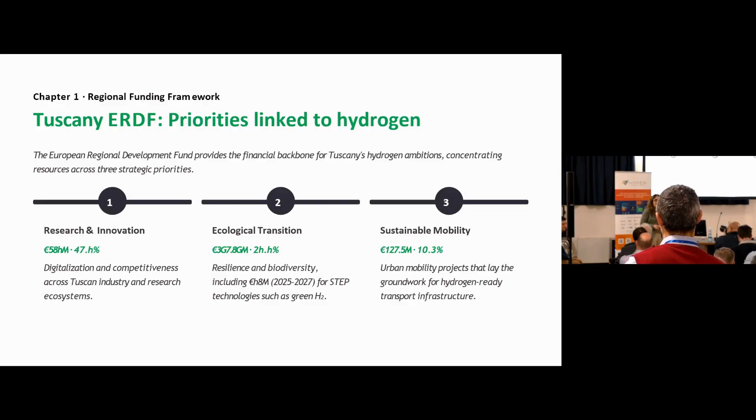Just a quick overview on the current programming period of the EU budget. We don't have a chapter on hydrogen, you can imagine, but we have some goals and policies that have already defined the priorities for development in the 7 years inside the region, with the cohesion funds that, after 2027, will not be available for regions anymore - this is very worrying for us. We have almost 50% of budget already allocated on research and innovations, and here hydrogen and other related research and innovation can be found. We have another 30% on ecological transition and 10% on sustainable mobility.

This is how the European funds are allocated in the current budget from the regional government of Tuscany. But going fast to the hydrogen sector, we started - I have to say it's not written here - in 2020.

After the COVID pandemic, we had to stop everything, and then we started a hydrogen board in 2022. The main focus was to say, okay, it's a new chapter for us. It's something very new for an institution, but we need to know what's going on in the region. So we had a call to collect all the projects that were going on, or imagined, coming from all sectors - research groups, universities, institutions, not so much, but mainly private sector.

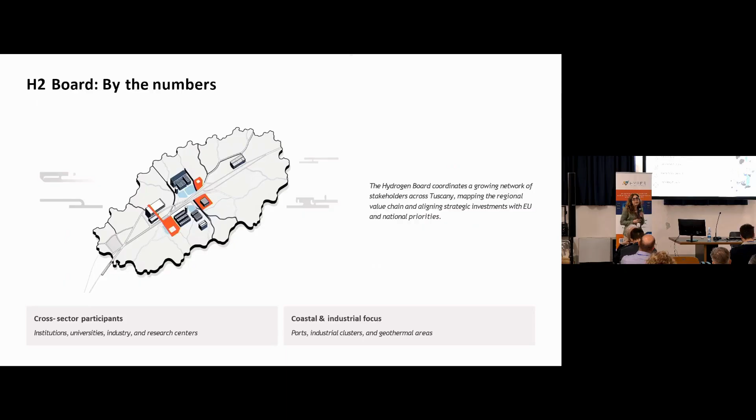So the board is increasing the network of people sitting around. We have gone through 2 years of discussing, exchanging views. It was not very practical, much more about knowing each other, understanding from our side what was worth working on at our level, and especially, as I was mentioning, in the logistics part with the Port of Livorno.

Then in 2024, the Port of Livorno came to Brussels, to my office, and that's the part in which we, as a Brussels team, jumped into hydrogen. You can say, what does it mean? It's not only me or my team, but we involved 4 different departments: the energy department, the economic development department, the competitiveness department, and the university and research department of the Tuscany region.

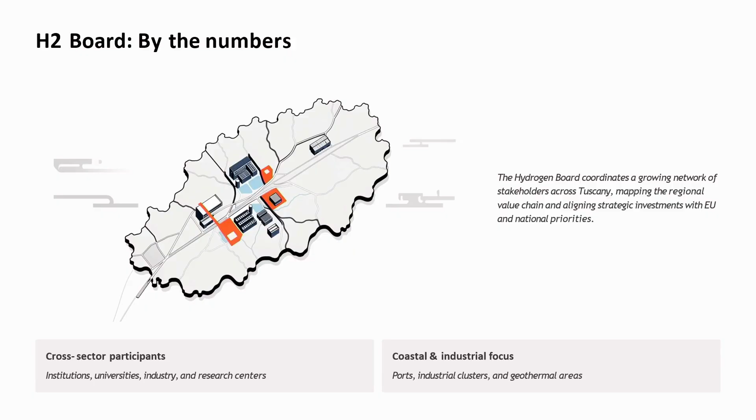So they are all part of the board. Then from 2024, we as Brussels office were focused more on how the Commission could help us push and boost the implementation of hydrogen valleys. There were some calls published by the Hydrogen Partnership, the joint undertaking, and we were interested in that. That's the reason why, and we wanted also to see what's going on in other parts of Europe.

In the meanwhile, in 2023, there were the NRRP calls from the Italian government, with 500 million in national budget allocated for hydrogen in industrial zones. Tuscany received a part of this budget, and 17.5 million were allocated to one flagship project. We had a call at the regional level, and we had 5 projects.

It's a very advanced technology, so it's still a little bit early. But the biggest one was this flagship project for a hydrogen valley in Rosignano, with Sapio and Solvay Chimica Italia, and this was the total investment that should come at the end now, or maybe just a little bit later. As you can see, there was a big focus on chemical industries, and that's one of the hard to abate sectors that we have in Tuscany.

But we have much more. We have many others - for example, the golden sector in Arezzo. They already have a hydrogen pipeline for green hydrogen, and they are also interested. We have in Lucca the paper industries. So we have some sectors in Tuscany that need to be focused on - they have hard to abate energy sectors that need to transfer and find other types of technologies.

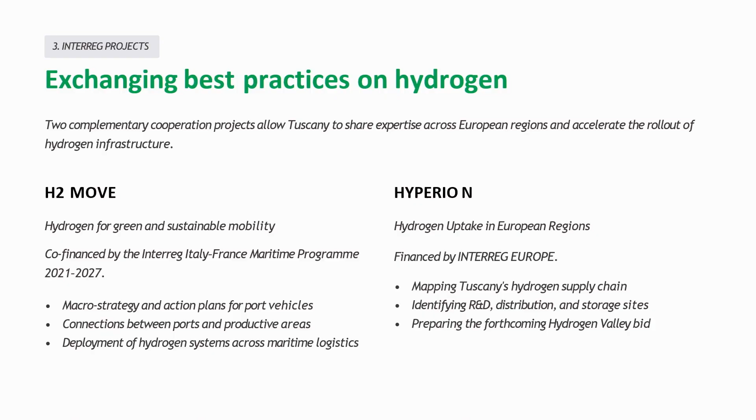And then we have H2 Move, run out of the Department of Infrastructures and Mobilities of the region, that is also part of the board - I forgot to tell you. And because, as you know, logistics is one of the main areas where you can apply hydrogen - big, heavy logistics, not private. Here in the master plan of the port, again, we are working together just to define the same main goal.

So what is going on now from 2025 until now? We are at the end - just two more slides, maybe three, no more. We have mapped the H2 chain, and on that we have selected, inside the board, a group of partners that can work on writing a business plan for our hydrogen valley.

Because we tried - there was a call in the second part of 2025, so we tried to push and prepare a document. We were in contact with the hydrogen partnership, but the part that was missing for us - we had the part related to research with the universities, we had our main goal, we had the Port Authority, but the problem was more understanding the potential market and the market agreement between the producers of hydrogen and the consumers.

And how they want to move and invest also, because we need big investment also from the private side. We don't have investment at a regional level - we can just take something. We are looking for the next call that will be in 2027, but it's just for a small scale hydrogen valley - now there has already been a sort of big scale hydrogen valley.

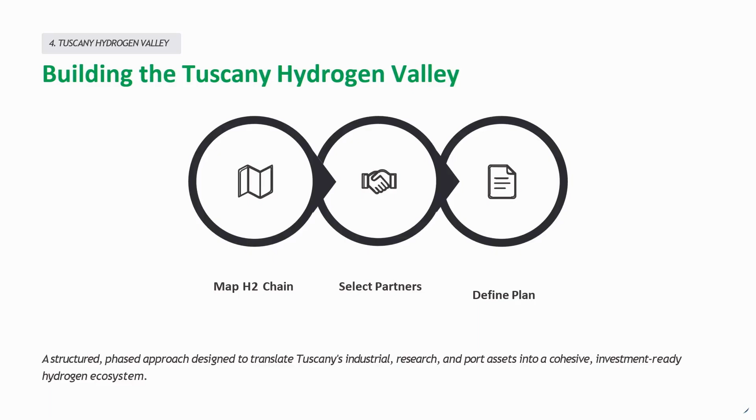So, with them, we define a plan. We ask the private sector: do you want to put your technicians with us? Just make some teamwork and see how you can put in your knowledge, because we know policies, but we are not technicians. So you can tell us more about what your companies can really provide, what is needed from your side, where you can invest, where it's worth investing, where the market can go, and if it's acceptable or not from your side.

So this is a small team that is now working, with Tuscany as lead developer inside, with the port of Livorno, because we want to build a hydrogen valley in Tuscany, but starting from the coast and from the port hub of Livorno, because we think this is very strategic.

The port of Livorno, as I was saying, in June 2024 defined a memorandum of understanding with the port of Damietta in Egypt to import green hydrogen, involving the Arab Academy and the University of Pisa, just to see how to face the challenges related to transportation of liquid hydrogen.

This can be something to look at for how to import, because as you know, here in Italy and Tuscany we have big problems having renewable energies that can be used for producing hydrogen, plus protecting the landscape and all the issues we know about. So a part could also be imported through a corridor, which could be interesting not only for Tuscany but also for Europe or Italy, through the port of Livorno, going up to the north.

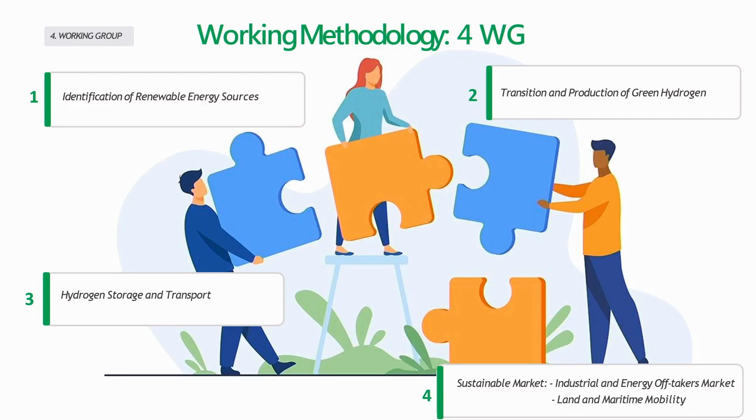Then a part is more logistic, transport and storage of hydrogen, and this is Piombino and Livorno, as I was saying. And then the part related to the sustainable market, so off-takers and industrial, and on the other side, the part more related to land and maritime mobility or local transportation.

2026. There is now a call on PDA Light to support a pre-feasibility study on a hydrogen regional valley, just launched now. It ends at the end of June. I don't think we will be ready for that. We will try, maybe, but I don't know, question mark.

But we know there will be another call in the second semester. So maybe we will apply then, but we need to have a ready business plan, supported by the hydrogen partnership, and then, as I was already saying, apply next year for the Hydrogen Valley call, and see what other type of investment we can attract in our region to push sustainability and transformation in the sense of hydrogen. Okay, I have finished. Thank you for your attention.

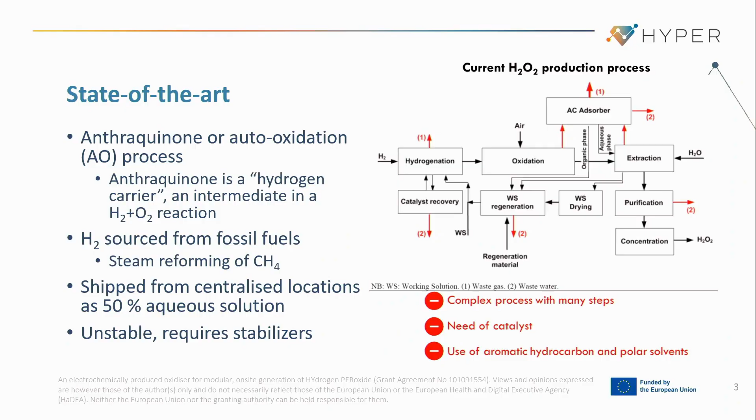So what we wanted to do is break this down and do it electrochemically and modularly. The idea when we wrote the project was that we would start with sulfuric acid and do an oxidation of that sulfuric acid to a persulfate. The byproduct on the cathodic side of the reaction would be hydrogen, which would be one of the added values you could get from the process. When we wrote the proposal 5 years ago, we were thinking you could store this persulfate as a chemical energy storage medium. The chemistry goddess does not allow us to do that efficiently, so that is not something we were looking at much anymore.

But then the second step of the process is what we call the utilizer, which takes this persulfate, reacts it with water, and gets the hydrogen peroxide out. This is electrified, so we can use green electricity to do this transformation. The steps are much simpler, we don't need a catalyst, and we have anticipated hope to get around 75% decrease in greenhouse gas emissions with this process compared to the state of the art.

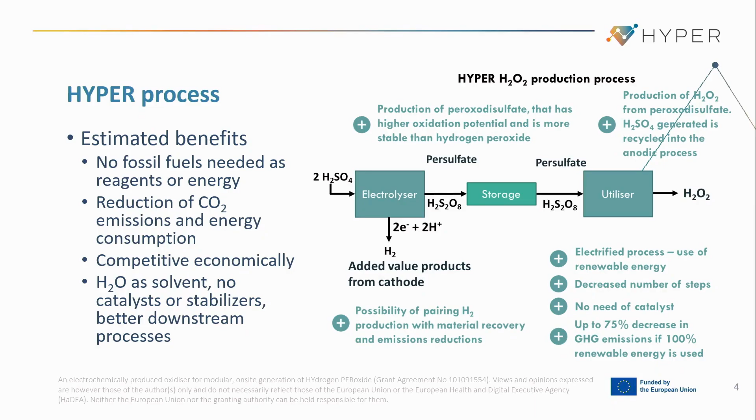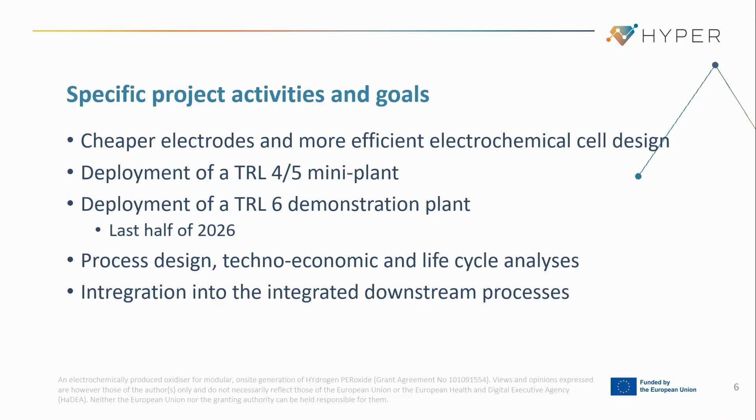So what you'll hear a little bit more about after I'm done are some of these things. In the project we've made cheaper electrodes and come up with a more efficient electrochemical cell design - that will not be part of the program today. You'll hear from Gregor at JSI in Slovenia about the deployment of our TRL4 mini plant. Andre from Belinka will talk about the deployment of the TRL6 demo, which will be happening later this year. Honk from PDC in the Netherlands will talk about the process design and techno-economic assessments we've done. Stavros from Everstang in Luxembourg will talk about the life cycle analysis, and then we'll have one of our downstream integrated processes presented with David from Helios.

So thank you very much. You don't want to hear any more from me, you want to hear from the people who actually did the work. So thank you very much.

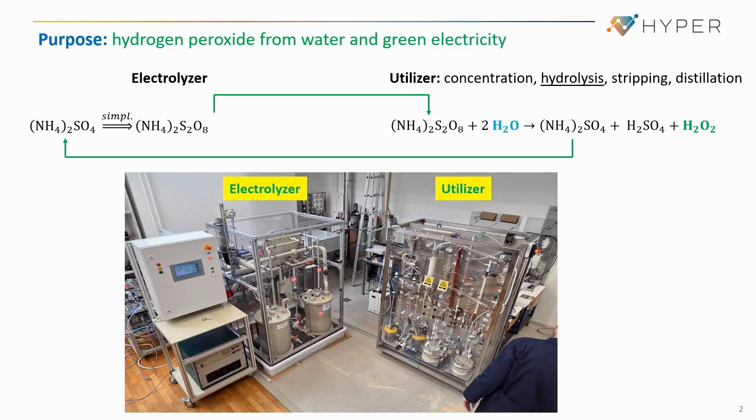The whole process is composed of two major steps: electrolyzer and utilizer. In the electrolyzer, we convert sulfates into persulfate using electricity. This persulfate then enters the utilizer, where it is converted into hydrogen peroxide. Sulfate is generated again and recycled back to the electrolyzer, so it's not consumed, it's a circular chemical that keeps the reaction going. The whole process is divided into two sub-steps.

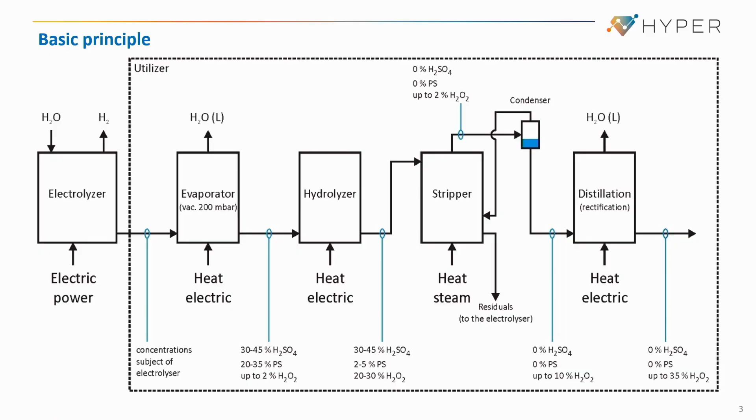The electrolysis is basically a one-step procedure, while the utilizer requires more steps. In the first step, the evaporator, we increase the concentration of the persulfate by evaporating excess water. Then we enter the hydrolyzer, where the persulfate is converted to hydrogen peroxide. Then we separate it from the rest of the chemicals, done in the stripper, which is driven by steam. This resulting low concentration hydrogen peroxide enters vacuum distillation, where we reach the target concentration of 30% or similar.

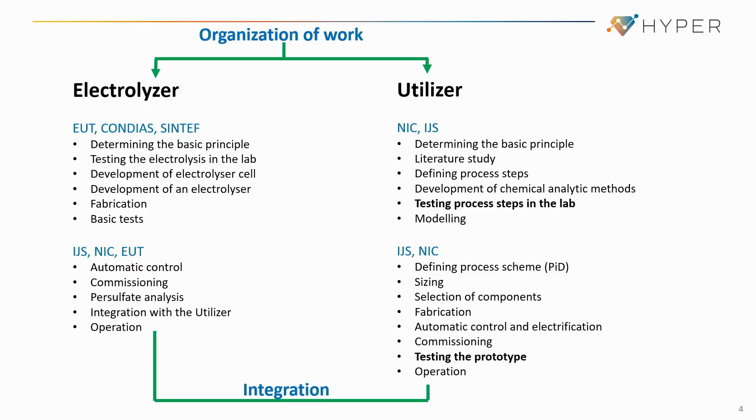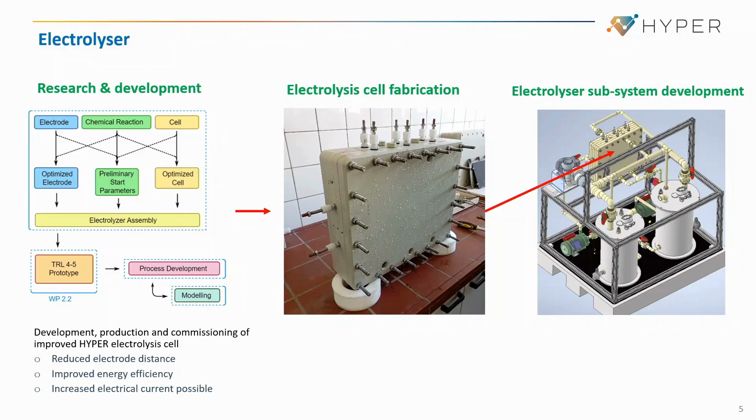This is how the electrolyzer was developed. It started with basic engineering, studying all the chemistry in the electrolyzer and designing the main components like electrodes, diaphragm, etc. This resulted in an electrolysis cell, shown in the middle picture. Around this cell, the whole system was designed with all the balance of plant components shown on the right side.

The utilizer development also started with basic engineering. First, all steps of the procedure were identified and literature was reviewed. Then all those steps were tested in lab environments, checking if all chemical reactions went as planned. One important thing was also the development of chemical analytic methods, necessary to measure the presence and concentration of the components appearing in the chemical reactions.

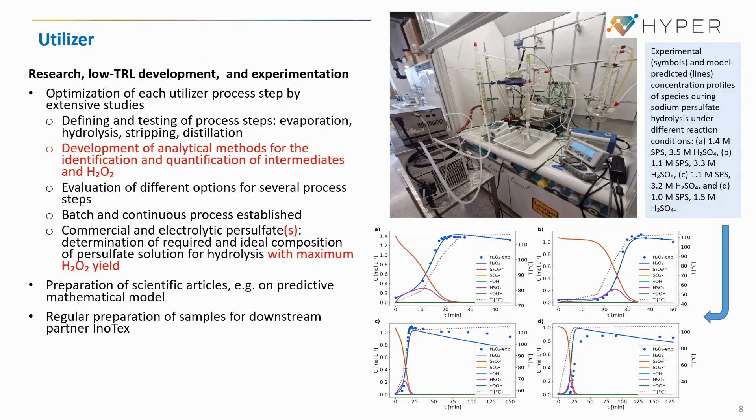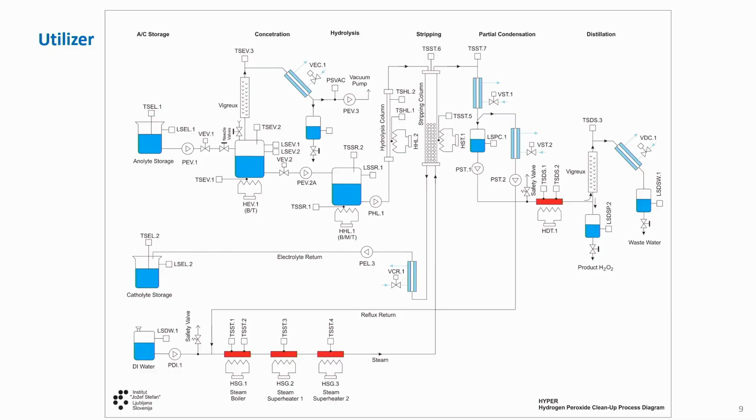Once that was completed, we developed this diagram, showing the basic components. This was a prerequisite for selecting the components and sizing them. The decision was to use glass as much as possible, because by using glass we avoid compatibility issues with aggressive chemicals. Also, with glass components we can easily see what is happening in the device, which is very important for troubleshooting in this early stage of development.

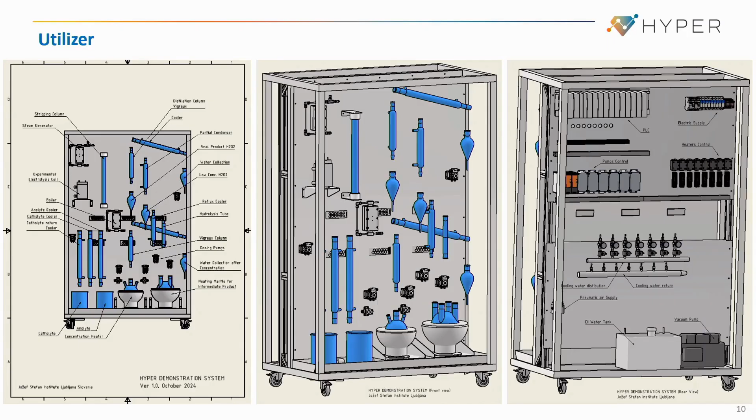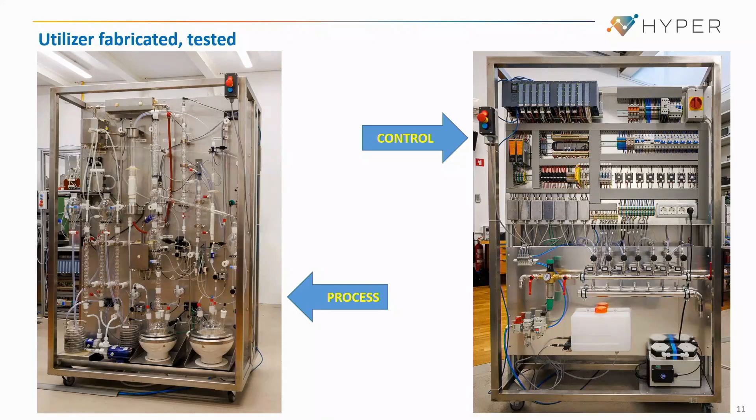This is one of the earliest 3D models of the entire system, showing the position of the equipment and components. This picture shows the system as fabricated. It's organized so that the chemical and electrical parts are separated. The chemical part is on the front side, safely separated from the electricity and control, which is on the back.

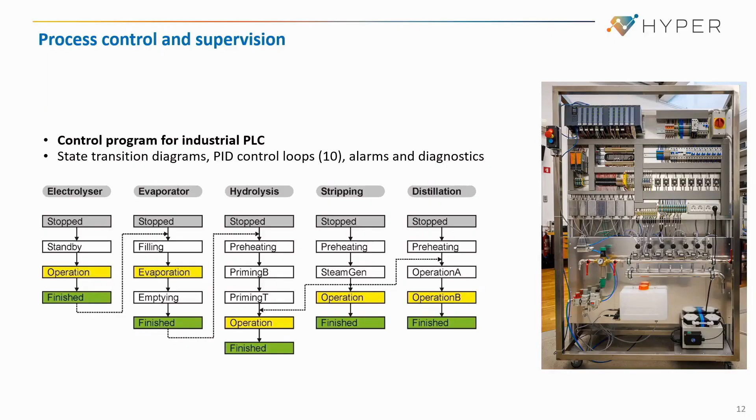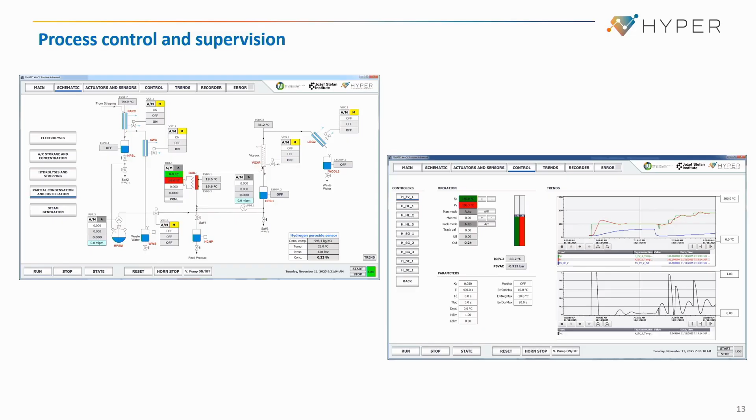Like any other process, this one is equipped with a SCADA system, so there are a number of screens that show the condition of the process, and all the variables and process states can be monitored using these screens.

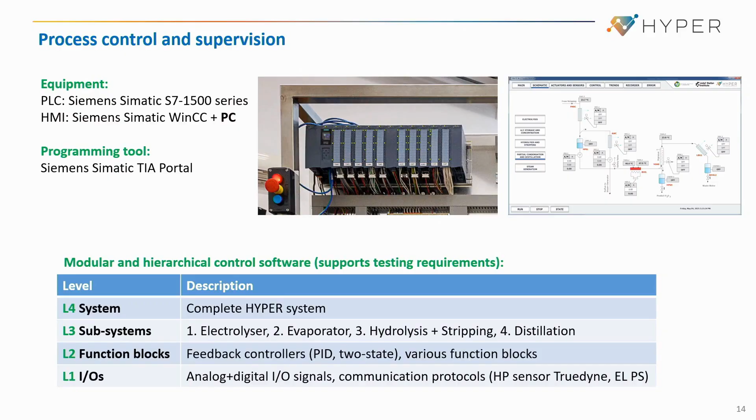The control is implemented in an industrial controller, which controls the complete system, utilizer and electrolyzer. There is a 4-level control. At the lowest level, we have input-output signals, communication protocols, and the possibility for manual intervention. One step above is a layer of feedback controllers, like closed-loop PID controls of various variables, plus other function blocks. On level 3, we have state transition diagrams for all sub-processes, and at the top level is the coordination of all sub-processes to run as an entire unit.

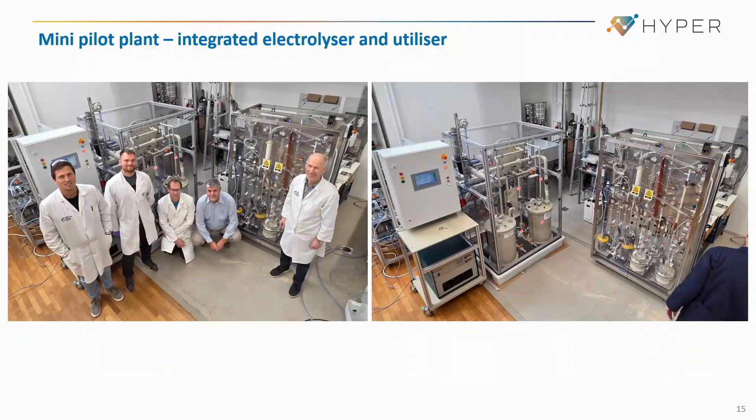So the process was built, it is up and running. Now intensive improvements and modifications are going on to make it completely automatical and to reach the TRL6 status.

One important project result is the demonstration of this process in the textile industry, at Inotex company in Czech Republic. This was done at the end of 2025 successfully. We moved the whole device to the Czech Republic, to Inotex, installed it, ran it, and produced hydrogen peroxide, which was then used in the textile process to prove its efficiency. So this is the main result.

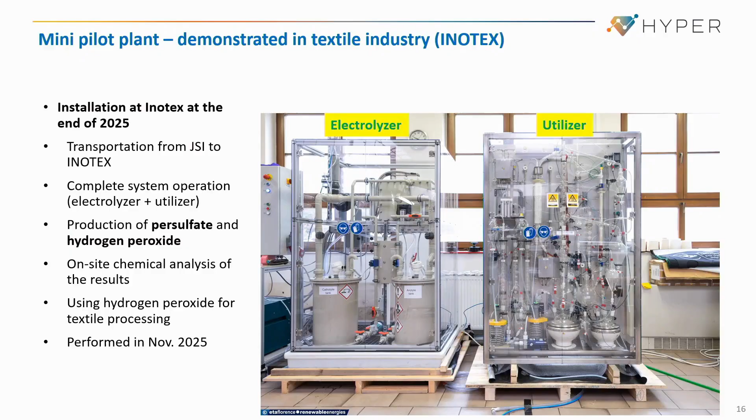Now we are aiming at final improvement and modification of the system and installation in the chemical industry in Slovenia. Thank you, this is all from my side. If there are questions.

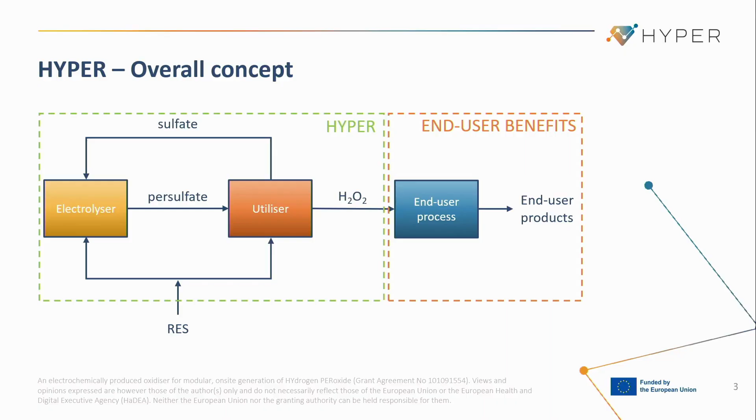So this is the concept we've seen before. We have the electrolyzer on the left side. The persulfate storage was indeed an idea, can still be done, but it turns out to be quite difficult and not so efficient. And then on the right, we have the utilizer, as just explained. Here it's even in a simpler way. We can produce hydrogen peroxide at several concentrations, from 5 until, say, 50%, depending on what is required.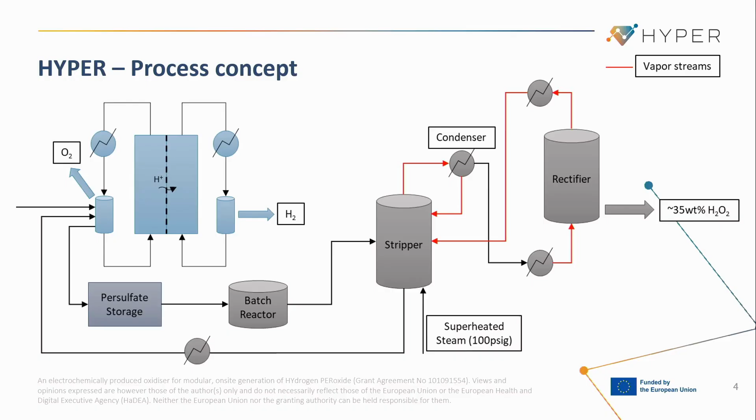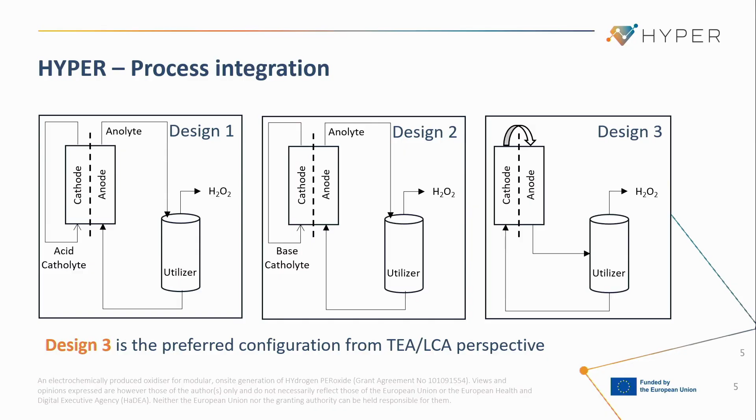The integration was a specific topic because if you look technically at the system, you could operate the catholyte system separately from the system with the electrolyzer and utilizer, which produce the persulfate. On the left, in design 1, these loops are separate, and you can use different kinds of catholytes. But we found out that to minimize the loss of sulfate and chemicals, the best way is to integrate it over the cathode to the anode and then to the utilizer and back. That was the preferred configuration from the techno-economic perspective and also from the life cycle analysis perspective.

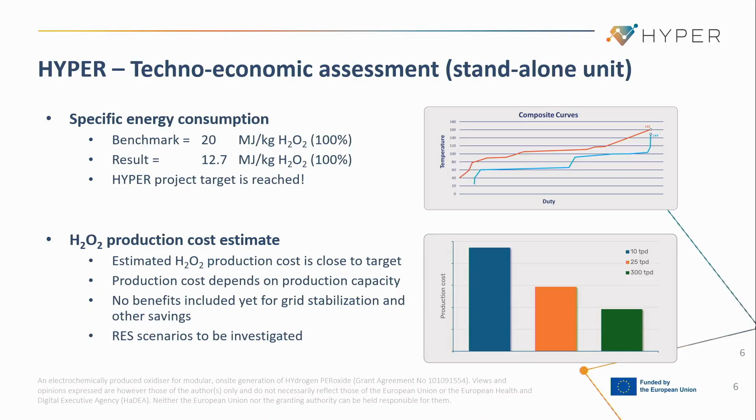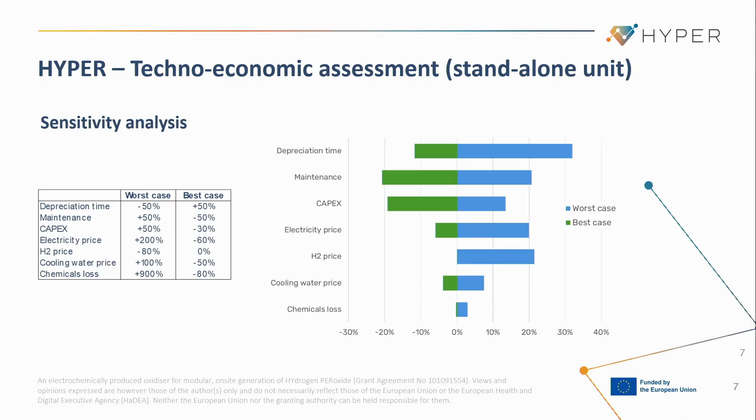We also did some sensitivity analysis, and you see that particularly the capital costs are quite important, especially if you build smaller systems, and then capital weighs quite heavily. If you take different depreciation times, you see that the spread is rather big. Also maintenance costs and capital costs are quite important, followed by electricity and also the selling price of the hydrogen.

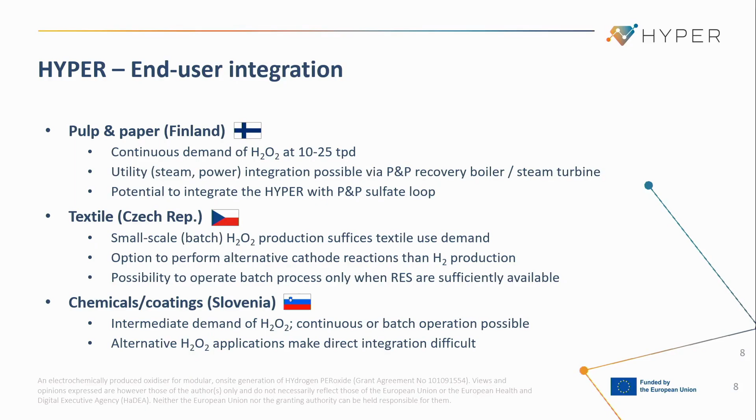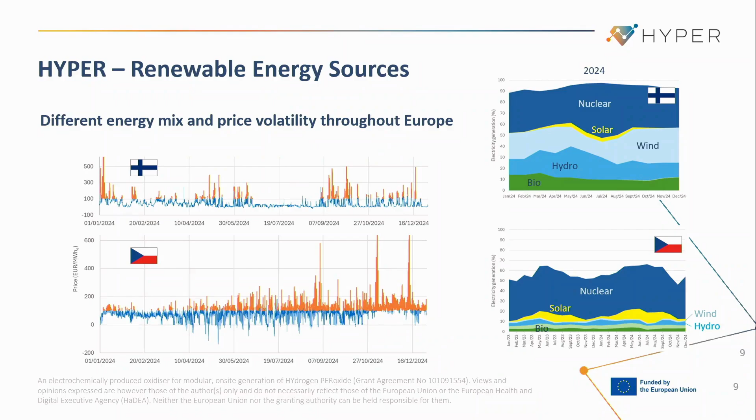Now, if you look into the renewable energy sources, you see that a lot of people talk about the EU mix, but actually that doesn't exist. It's more regional, or as I look to you, Sylvia, it's more per country. You see, for instance, that in Finland the energy mix is totally different than in the Czech Republic, and the pricing is different over time and also per country. So that is something we now work on implementing.

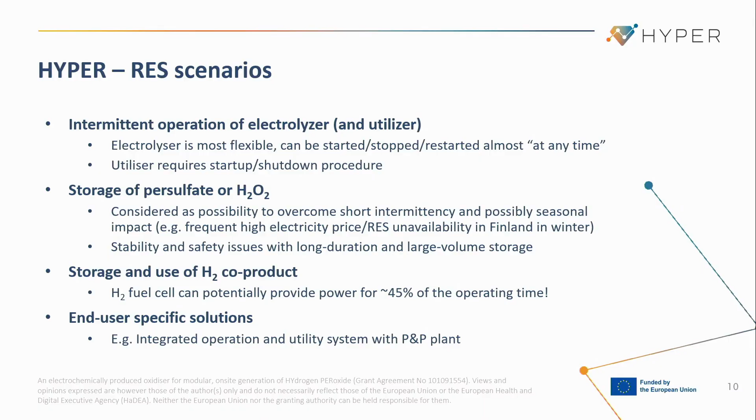And of course the safety aspects are also important if you start storing persulfate or peroxide. We also look at the co-product. Will we sell it? Can we use it ourselves in the periods that we don't have electricity? And we can also have alternative solutions in connection with the end user application.

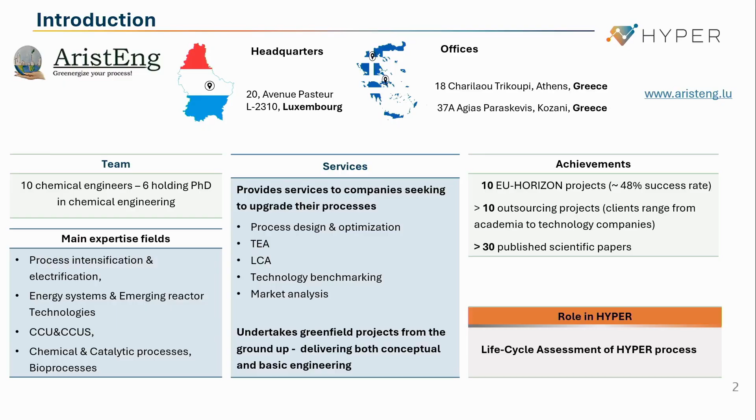In this project, we focus on LCA analysis. So we are performing the environmental assessment, and we focus at the moment on the calculation of carbon footprint, aiming to identify the polluting drivers at this level. So what is a polluting driver for our Hyper process? And to do that, we also make a scenario analysis.

Since Hyper is an electrified process, electricity plays a major role. So we make a sensitivity analysis regarding the impact of electricity. We vary the source of electricity from 100% grid to 100% renewable electricity. How do we do that? We increase the penetration of renewables.

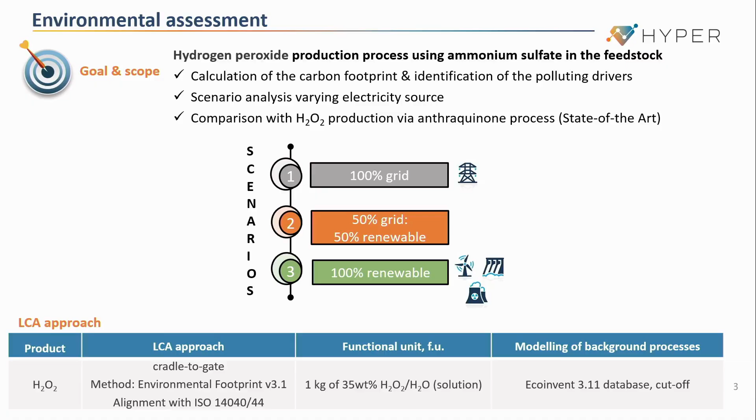The method that we follow is a cradle-to-gate method, following the environmental footprint approach, which is aligned with the ISO standard 14040 series. The functional unit for our analysis is 1 kilogram of diluted hydrogen peroxide, 35 weight percent in water. So throughout the presentation, when I say functional unit, I refer to that value. All the background processes beyond Hyper are modeled using the Ecoinvent database. The boundary limits for our analysis are perfectly aligned with the TEA, so LCA and techno-economics follow the same boundary limits, to give the proper message to the audience.

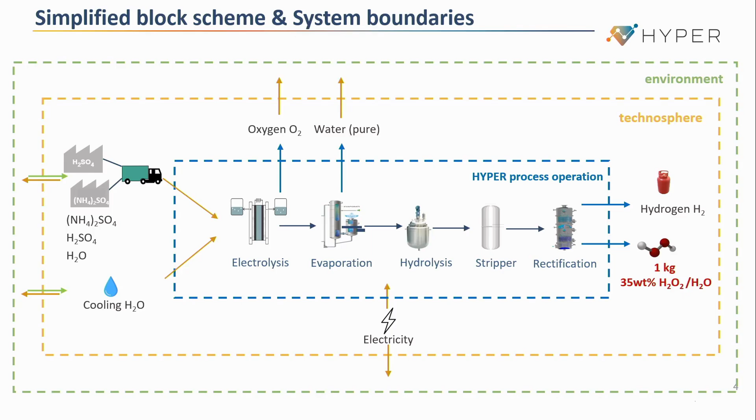So we start with the blue box, which is the Hyper process, comprising different process steps, and then we also model the interaction with the technosphere. Basically, we model the raw material inputs and the electricity or energy input, and also the outputs from our process, which can be the products, but also some side streams, and of course the impact they have on the environment.

So we calculated the carbon footprint equal to a value of 0.36 kilogram of CO2 equivalent per functional unit. And as I said, this is based on grid electricity EU mix, due to the volatility and the differences in the carbon intensity of the grid in several countries. At this level, we focused on EU mix, but we are planning to take this into account by applying Monte Carlo sensitivity analysis and uncertainty analysis, in order to see what is the impact of different geographic location on the carbon intensity of the electricity. But this is to be done in the coming months until the end of the project. At the moment, we focus on the EU mix, which is a valid approach in order to have comparison on the same basis.

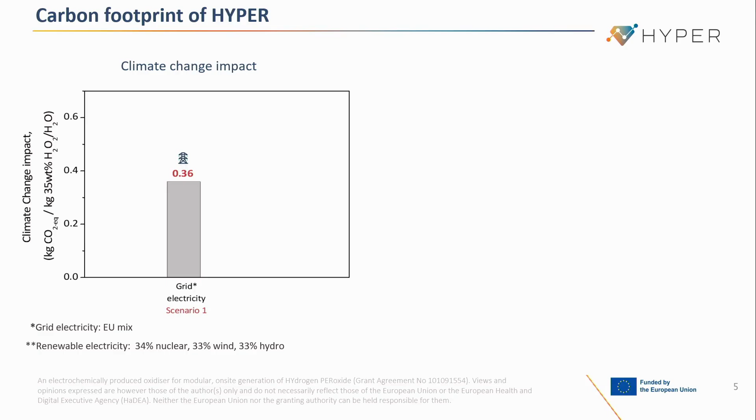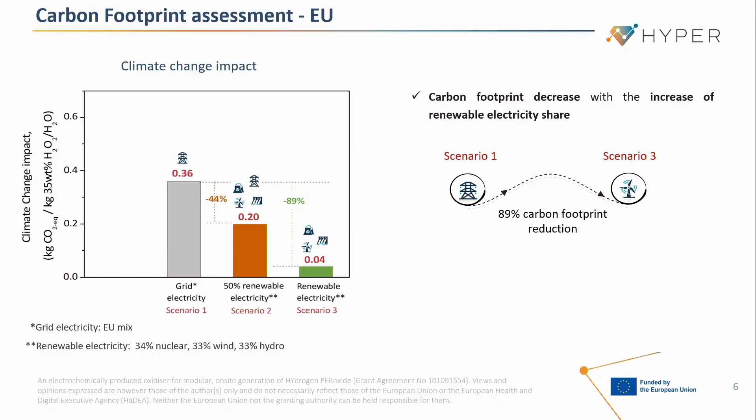And we also found, as expected, that when we increase the penetration of renewable electricity, we can decrease the carbon footprint of the Hyper process by 90%. So moving from grid to fully renewable, we can decrease the carbon footprint by 90%. The EU mix grid, according to the Ecoinvent database, includes some renewables, around 40% powered by renewables. And when we go to fully renewables, we have a 90% decrease of carbon footprint. Of course, these numbers don't say anything if you don't compare them with the state-of-the-art process, which will come soon.

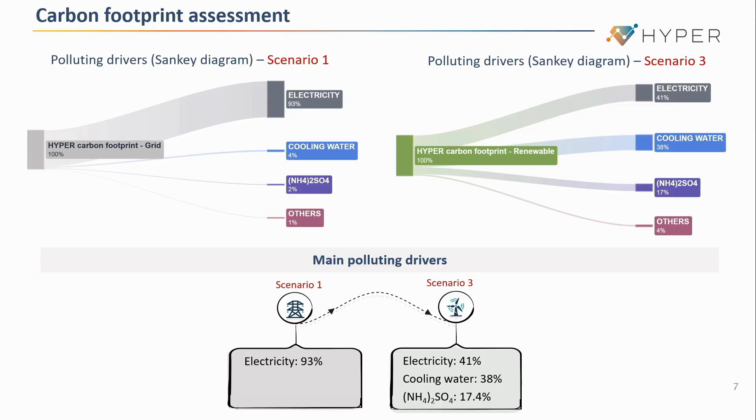But first, I wanted to show you what is the polluting driver of our process. Of course, it is electricity. Even in the scenario where it's only powered by grid electricity, or the scenario where we have full renewables penetrated in the electricity source, our polluting driver is electricity.

Comparing this with anthraquinone, we have some nice results highlighting the potential of our Hyper process for hydrogen peroxide production to decrease the carbon intensity by 40%. Anthraquinone in the first bar has 0.6 kilograms CO2 equivalent per functional unit. We can go to 40% less assuming electricity source by grid, and 93% less assuming fully renewables. Of course, the penetration of renewables depends on the geography.

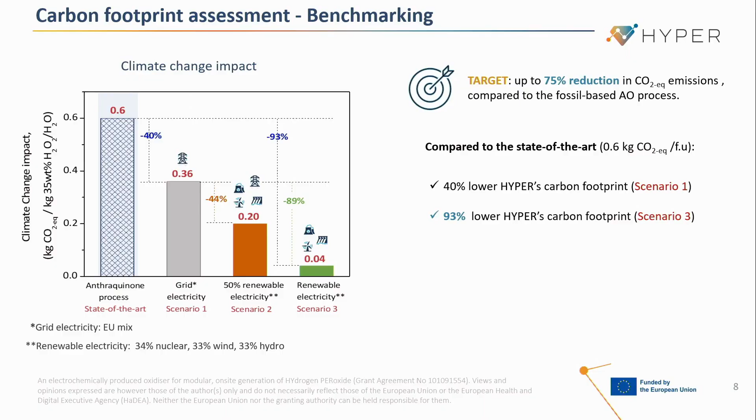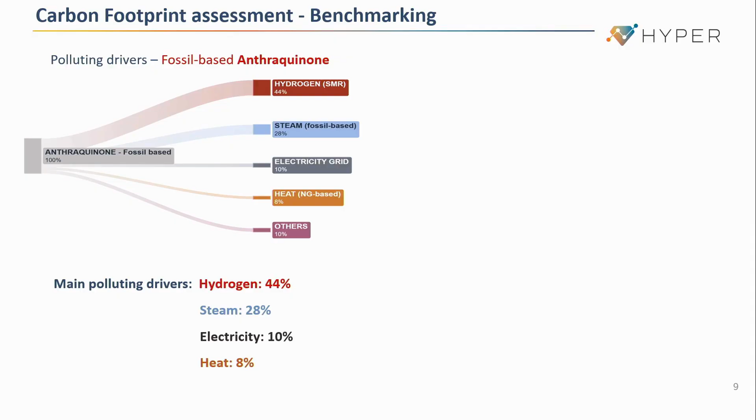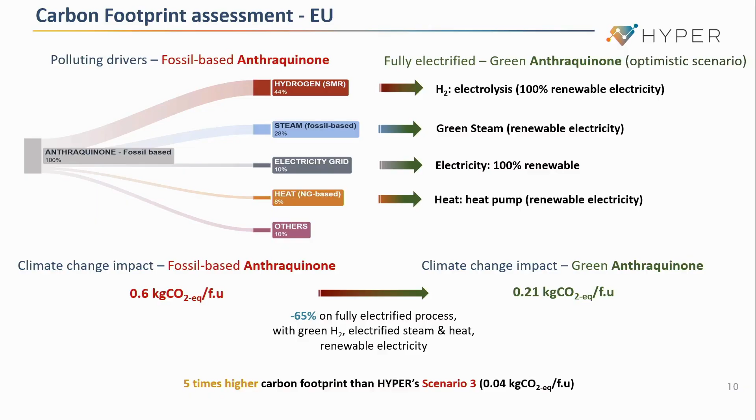What if we make an assumption and make anthraquinone green? The hydrogen required originates by electrolysis powered by renewables. We have so-called green steam, produced by renewable electricity. So everything is powered by renewable electricity - an ideal scenario, yes. But what we want to highlight is that the carbon intensity of anthraquinone decreases from 0.6 to 0.2, and even in this idealistic scenario, Hyper's carbon footprint is 5 times lower. So if we want a process that is more environmentally friendly, Hyper has the potential to be one of these processes.

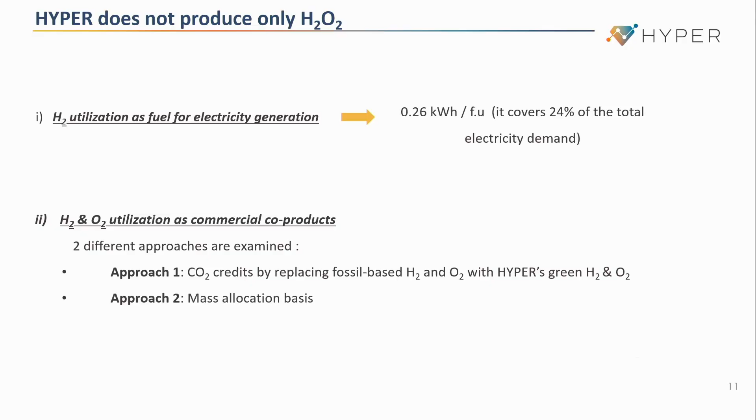But until now we take into account that Hyper produces only hydrogen peroxide, which is not 100% true, because we also produce hydrogen as a byproduct. So what we did in the next slide - we thought this hydrogen could be used to produce electricity, or it can be sold as a byproduct, and then you can get credit by replacing fossil-based hydrogen.

So we perform the same analysis, always comparing - the first bar refers to the anthraquinone process. We compare with different scenarios: first bar anthraquinone, second bar Hyper process powered by grid electricity without utilizing the byproducts. Then when we use hydrogen fuel, we have potential to further decrease the carbon intensity, and then it depends on other scenarios.

For example, if you sell hydrogen, you can get credits, because you replace fossil-based hydrogen. These credits result in a very huge decrease of carbon intensity, going down to 0.04 kilograms CO2 equivalent per functional unit. Or if you apply mass allocation, calculating your carbon footprint based on mass basis - simply saying I have three products: hydrogen, oxygen, and hydrogen peroxide - applying mass allocation to calculate the carbon footprint for the hydrogen peroxide, we can go to 0.33.

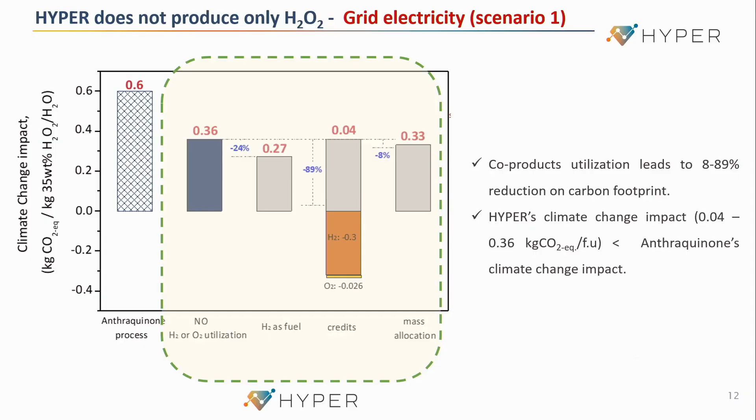Overall, we achieved to go below the anthraquinone process, and depending on the approach or valorization of the byproducts or not, we succeed in 3 to 5 times less carbon footprint than anthraquinone.

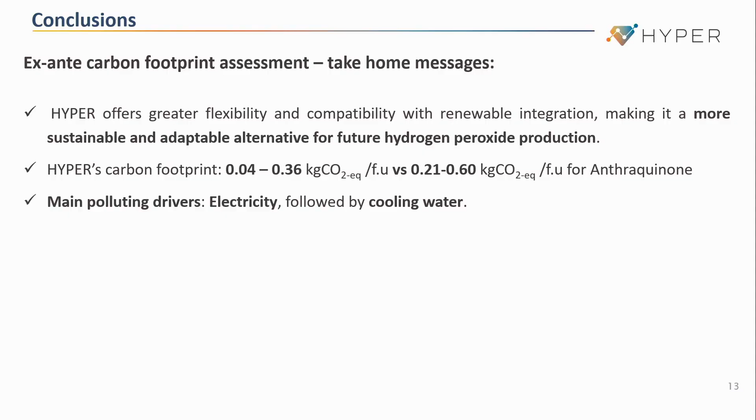And all this brings me to the conclusions. We have an electrified process for hydrogen peroxide production which offers great flexibility and compatibility with renewables, making it a more sustainable and adaptable alternative for hydrogen peroxide production. Compared with anthraquinone, the Hyper process succeeds in decreasing carbon intensity by 3 to 5 times. We identified at this stage that the polluting driver is, of course, electricity for Hyper. Thank you.

Any question? Thank you.

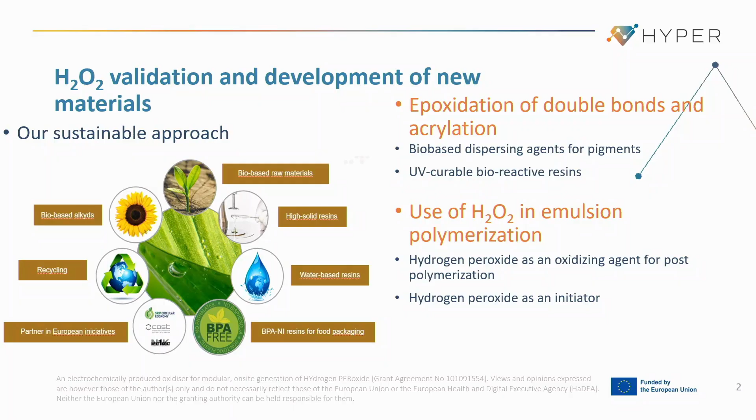The first part is the epoxidation of double bonds. So we have some bio-based oils which are unsaturated. We have these double bonds. In this concrete case, we have soybean oil.

We reacted it with hydrogen peroxide with catalysts of formic or acetic acid, with amberlite, which is actually a substitute for sulfuric acid, and of course 35% hydrogen peroxide, which can be commercial or from our hyper process to reduce the carbon footprint, like we already heard.

The finished product is these epoxidized soybean or other types of oils, which can be used for pigment wetting, which we already tested also.

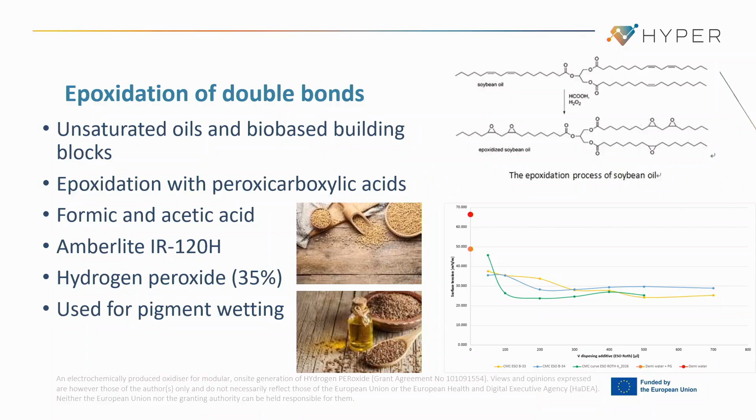Here we see a graph of surface tension compared to the titration volume of our pigment wetting dispersant, compared to commercial samples. The green line is a commercial sample, and the yellow one is still one of the first samples. With our blue sample, batch 34, we were able to come closer to the commercial sample. Development is still in progress, also on other types of oils, but we see some promising results in this scenario.

The second type is reacting our already epoxidized oil with acrylic acid in the presence of some catalysts and radical scavengers, so the terminal double bonds we implement to the molecule don't react too fast, so we don't have a solid gelated polymer already inside.

And these types of resins can be used for UV coatings, usually for wood, plastics, or other similar substrates, or for 3D print resins.

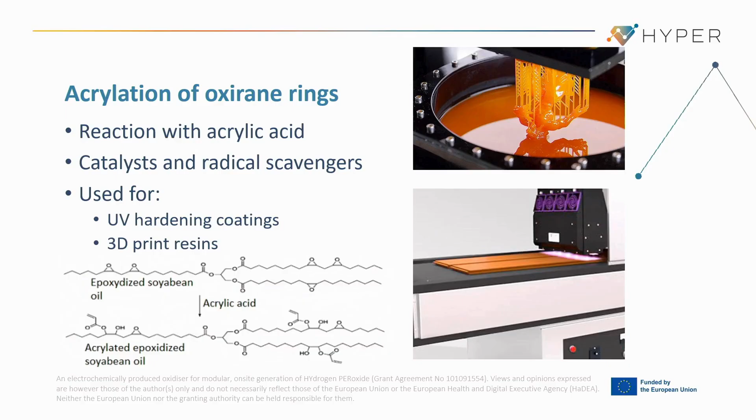That was more of our core business, and the pigment wetting dispersants were something we did in line with the hyper project. We also did a lot of application results already because it's our third year. We've been very busy. Here is one of the examples.

Our coatings department, the wood coatings department, did a UV curing transparent base coat, where 50% of the resin composition of the coating itself is from our bio-based resins.

Here you can see a lot of the types we tried out. So we have a standard sample, and then we did work on tall oil, which is derived from black liquor from pulp and paper production, from cardanol, from cashew nut waste products, and linseed oil, and soybean oil.

So some food grade oils which are more commercialized are already seen on the market, so we were able to compare it to state-of-the-art products, but we are trying to make a step forward with non-food related oils and unsaturated molecules.

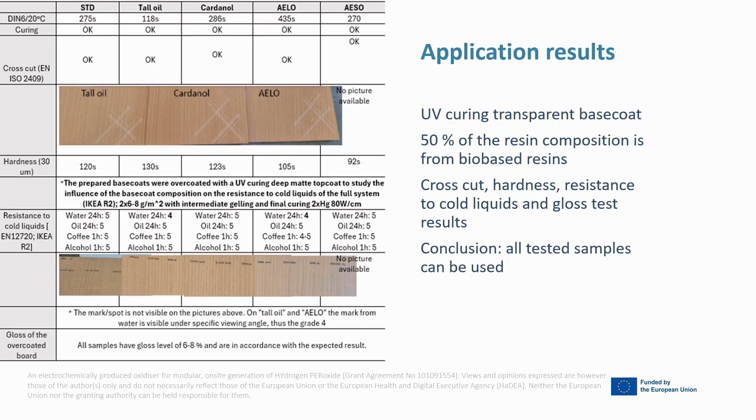The second project we were doing was the use of hydrogen peroxide in emulsion polymerization, like I already mentioned, for acrylic and styrene acrylic latexes.

The first step we did was just trying to use hydrogen peroxide as an oxidizing agent for post-polymerization. So after we do the polymerization in our emulsion, we still have some residual monomers left that are too high for our customers. So we induce a post-polymerization step, usually with some sort of initiator.

But in this case, we did it with hydrogen peroxide, and we concluded that actually we can use hydrogen peroxide as a post-polymerization step.

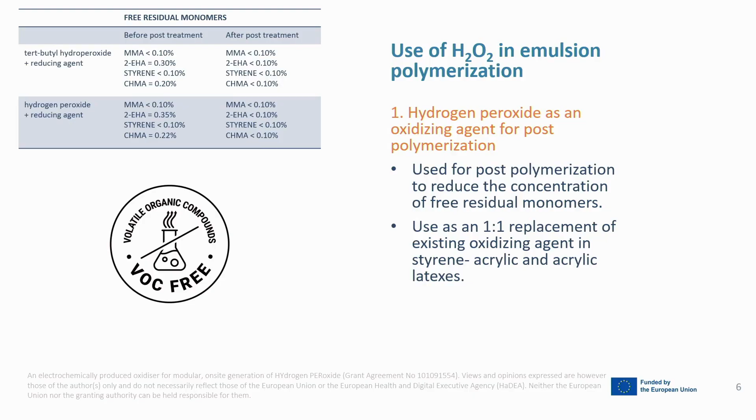And we could use it for the second step where we used hydrogen peroxide as an initiator. In this case, we substituted ammonium persulfate for hydrogen peroxide and ascorbic acid.

What we achieved was, firstly, for the carbon footprint improvement, we were able to drop the reaction temperature from 85 to 40-60 degrees Celsius, which of course lowers our carbon footprint in the production. It lowers our heating costs, our production costs, and on the other hand, it also achieves higher molecular weight, which usually means a better performance of our coating.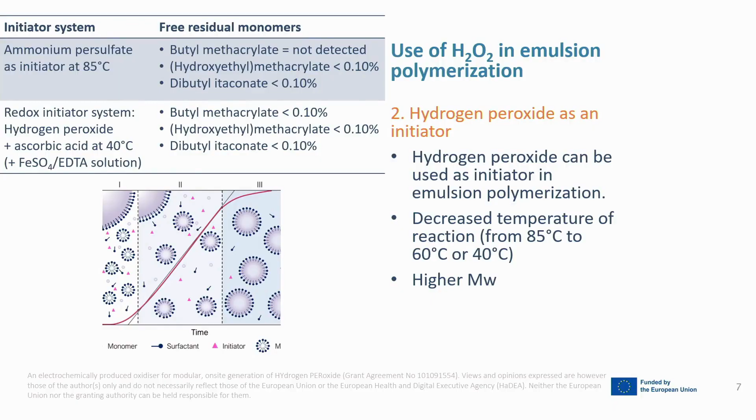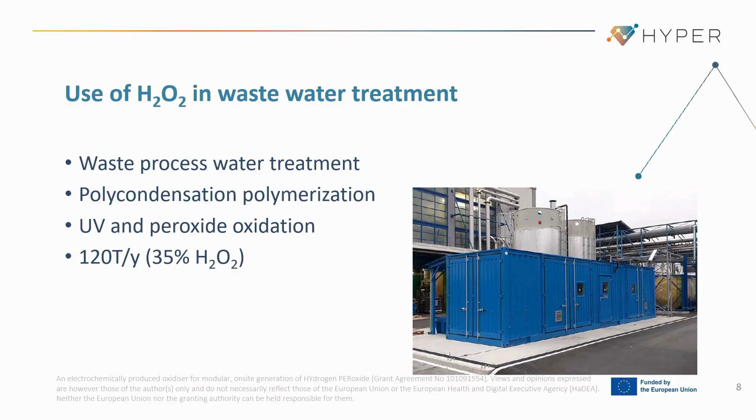We also tried two different pathways according to our agreement and what we promised, and we are quite successful in the implementation. If there are any questions, this is more of a general introduction to what we've been doing.

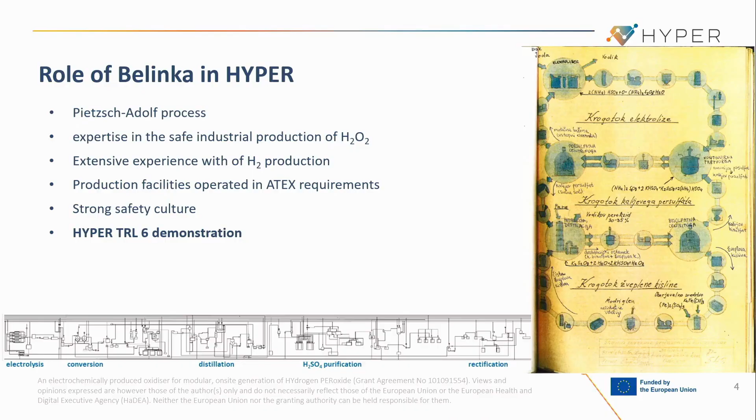And what is the next step? I'm proud to say that colleagues from the consortium - JSI Chemical Institute, EUT, Condias - really brought the technology to the step we are at now, where we are going to Belinka Perkemija to demonstrate, starting with the pilot plant in Belinka. So from the concept to TRL 4 and 5 in Inotex that was presented to us with great passion, and now in the second step coming to Belinka Perkemija in a little bit different way, and a little bit bigger.

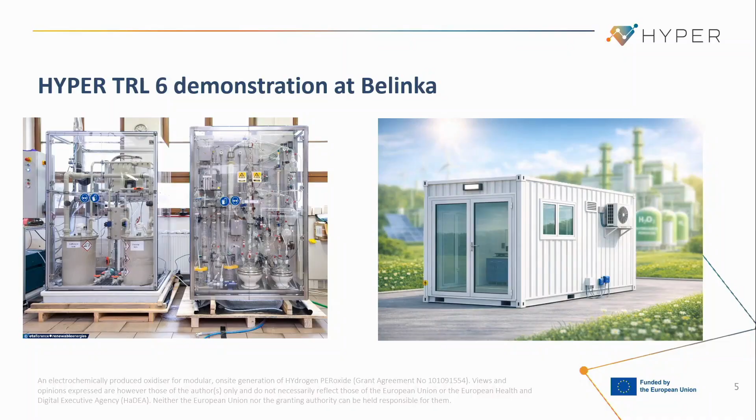So this is the site of the demonstration at Belinka Perkemija. What we provide is the demonstration site. This is in our company next to the boiler site and also hydrogen plant. We will install it on site, give all the necessary connections for the plant, and operate the process with 5 campaigns for 200 hours, which is actually our goal of the project.

What is very important is also to analyze the whole system and see what actually the process will bring at the end, and see what kind of product the technology will give.

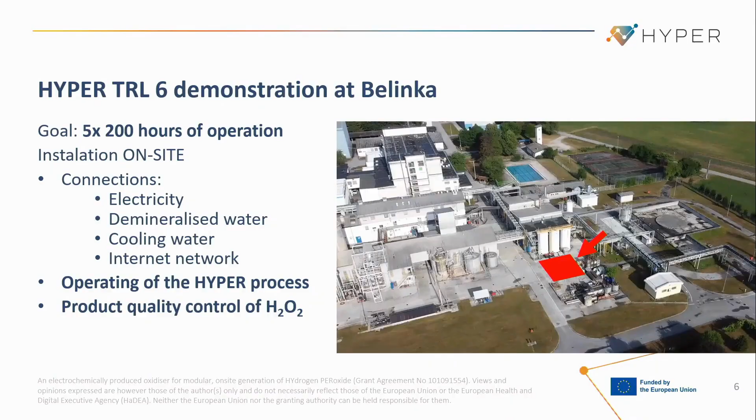So looking forward beyond this, based on what my colleagues said before me, we have really solid fundamentals at this point. The project has solid fundamentals on techno-economic analysis that Hank from PDC presented, also LCA, and the project should really not stay in some drawer and should really bring the right partners to the next step, search for new funding, and bring technology to the end users.

That was presented before. Regarding the quality, one of our partners, Inotex, did some preliminary tests, and it clearly shows that the hydrogen peroxide is pure, so potentially no need for another step of purification would be needed.

So this could open really potentially segments of added value in the future to tackle the dependence of the price of electricity and potentially the difference in the European market. You know how it is in Italy, how it is in Slovenia, maybe in Austria, and the next step to Norway, where the prices really are quite different.

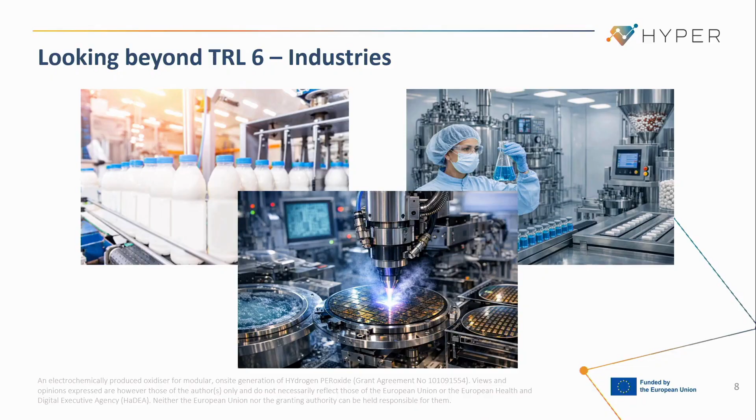So when you're talking about industries such as pharma, such as electronic wafers and etching, where hydrogen peroxide is used, the price is never a question. And that is really a great opportunity where you have potentially such good quality of the hydrogen peroxide.

Thank you very much for your attention. Please.